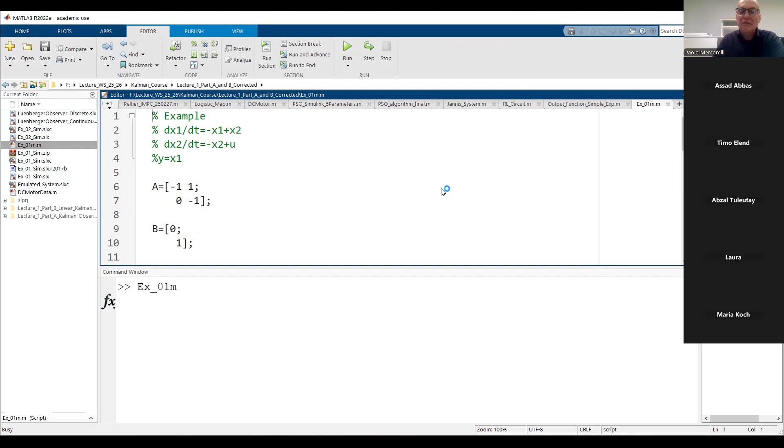Yeah, this is the M file, which I presented, I think, 2 or 3 times. Let me run this M file, in which we can see again the system which we considered many times, characterized by the matrix A. You can find the details in the first presentation. It's characterized by the matrices A, B, and C, in which we are measuring the variable x1.

With this variable, you remember, the system results fully observable. This means without any problems we can build the Luenberger observer. Let me open the Simulink file. I analyzed this in depth last time. Let me just show you which kind of problems we have if I include the noise in the measurements, first of all, and then if I consider some unknown parts in the model. And then I have the possibility to go more in depth in the philosophy of the observation.

Just a second, because MATLAB is running. In the meantime, let me see if I find something. Okay. Ready.

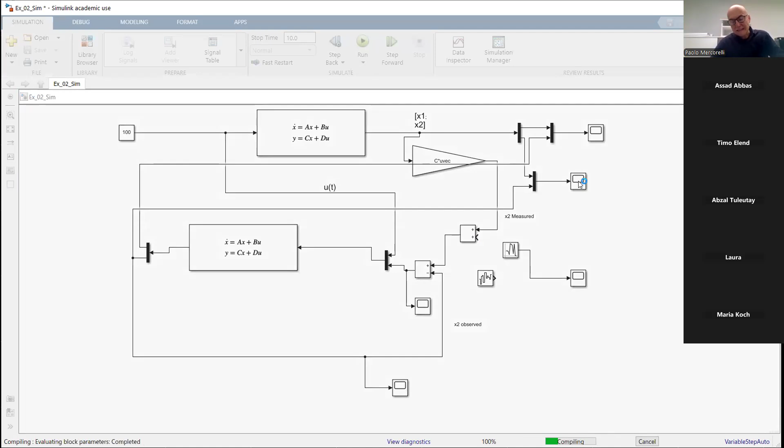Let me now share the Simulink. Do you remember, we have seen this in detail. I think at the end I showed you also the case with the noise, but let me redo it without noise. And we have a relatively good observation of results. I don't want to say observation, because observability is a structural characteristic. I would like to say we have relatively good results.

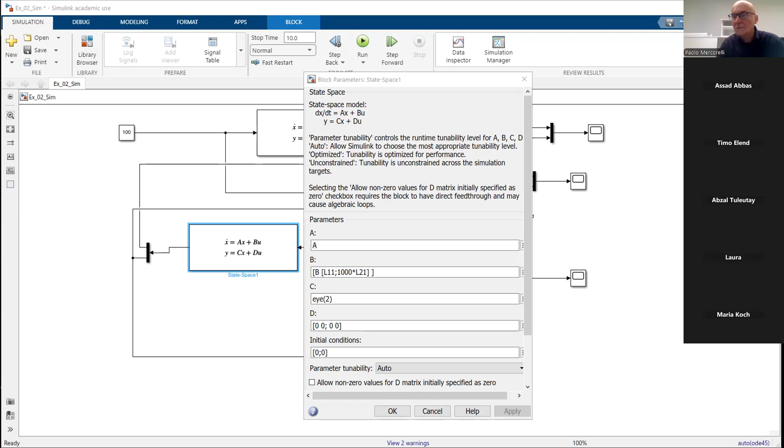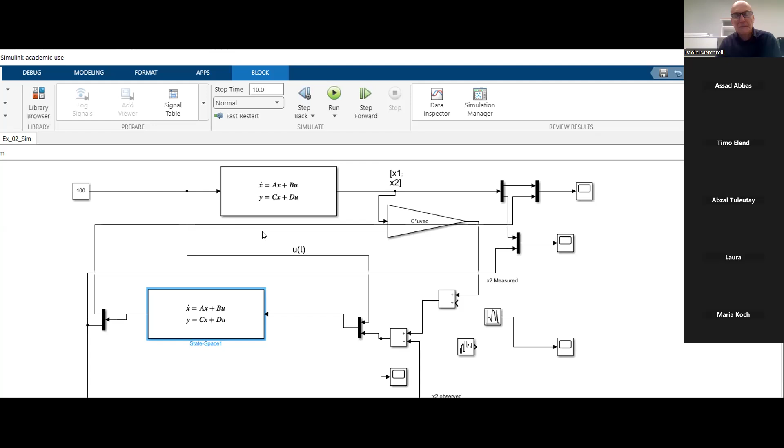Of course, here probably I changed the matrix A. Let me see, one second. I think this is not the file. Is this the correct file? I tested different things. Let me see in the folder. Okay, this is exercise number 2, which I didn't show you. Excuse me. Let me close this. Let me open the right file, which is example number 1. It's here. Let me share. Okay.

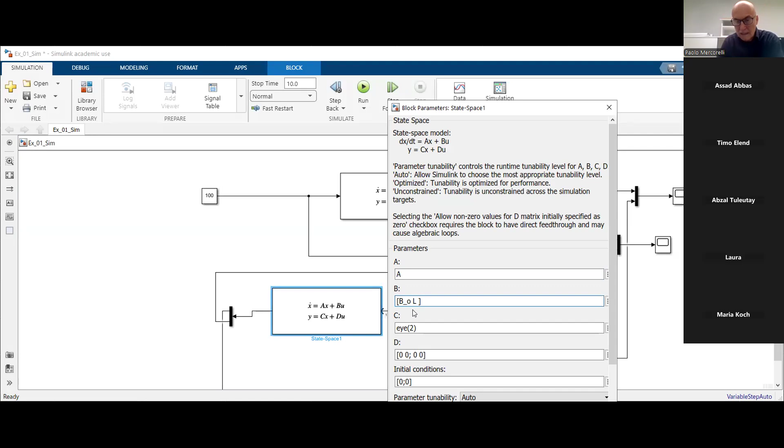Here we can see example number 1, as I told you last time. Let me eliminate the noise and show you what we had last time. This was the result. You remember last time I told you many times how I can accelerate the dynamics of the observer.

But of course, you remember I told you that accelerating the dynamics of the observer, I typically increase this peaking effect. We will see that using the Kalman filter we can minimize also this peaking effect, maintaining good results in terms of speed of convergence, because the Kalman filter is an optimal approach. This means we can find a compromise.

You remember I told you, placing the eigenvalues of the matrix A minus L multiplied by C, I can speed up the convergence of the blue line, roughly speaking, of the observer. The convergence is an asymptotic convergence because the structure here is not a finite time observer. And then we discussed a lot.

Let me show you what happens if I have measurement noise. I think I share; sometimes I forget to share. If I add the measurement noise, now we have some problems. The problem is not connected with observability, because the system is observable; the observability characteristic remains. But we will see an effect that we would like to minimize, and the Kalman filter is exactly a structure that tries to minimize this effect, which we can see in the results.

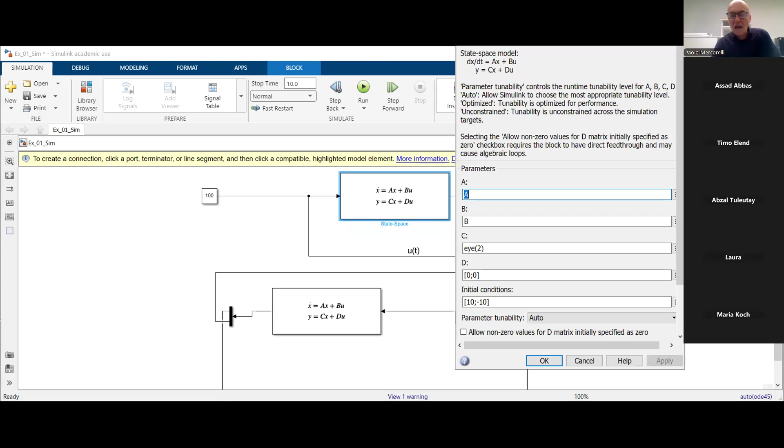Assuming that I know the system perfectly. This means, let me show you, until now we have seen a linear system characterized by the A, B, C, D matrices. And this structure here can be found in a part of the system here, inside. Let me show you this.

In the observer, we can see that we have the matrix A here, the matrix B here. We have the matrix L. I told you about the matrix L, the meaning of that, to place the eigenvalues. We speak about the eigenvalues because we are in the case of linear systems, in order to speed up the dynamics of the observer, or let me say, to reduce asymptotically to zero the estimation error.

Arbitrarily. Look, if I change this, now why do I change? Because it could be that I don't have exact knowledge about the system. Assuming that I am able to say we have just two states, as in this case, x1 and x2, it could be that I don't know exactly the parameters which characterize the model. Let me show you what this B_o is, the B observer, let me share.

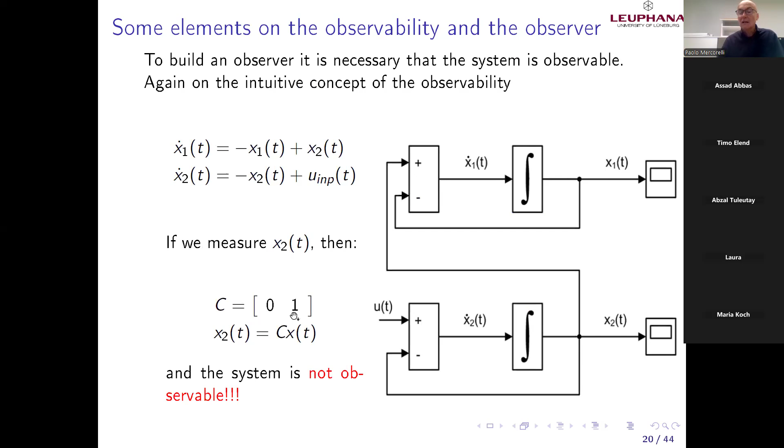But both dynamics, x1 and x2, are asymptotically stable, because the eigenvalues of the matrix, which I calculated for you, were -1, -1. Somehow we can build the observer, but of course it's a particular observer because I cannot state as I want the dynamics of the observer itself.

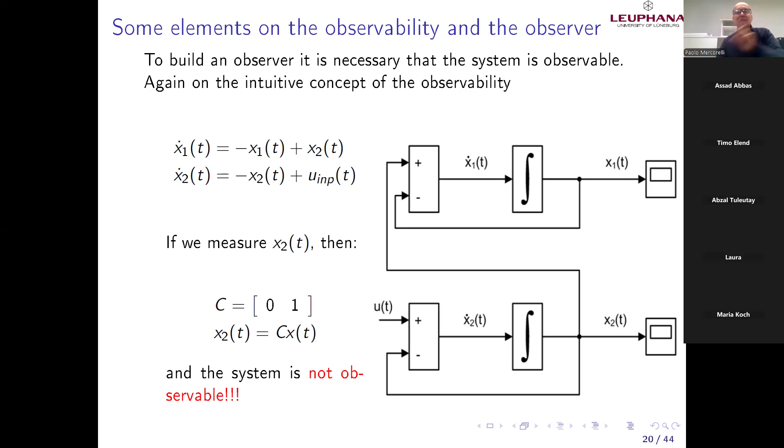So let me show you quickly. I opened the example number 2, and it makes sense now to show you, even though I didn't upload it, but I will. This is the example. Using 0, 1 through the calculation, I will obtain this equation here, in which we have just one parameter to be designed, L21, because L11 disappears because of the presence of the 0 in the determinant. I told you this last time.

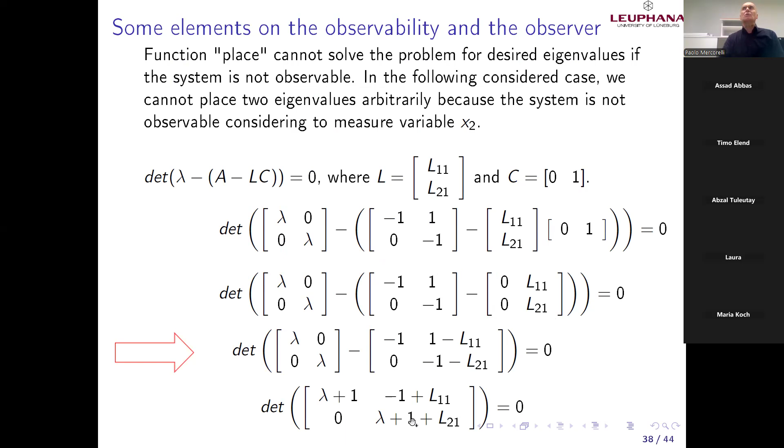And of course, I cannot place both eigenvalues. I can place just one. We can see here I cannot place both because I have just one parameter. Now, if you look at this easy example, we have just one parameter, exactly the equation as I told you.

Now, assuming that I would like to place the eigenvalue lambda1 equals -2, I can calculate L21, easy, a high school exercise. Now, with L21 equal 1, I can calculate this equation here, which can be written in this form, where I have the other eigenvalue.

There is a theorem which I don't have time for, but I can show you nevertheless that if the system is detectable, meaning the unobservable part of the system is asymptotically stable, I can always find parameters, in this case one parameter, for which both eigenvalues have a negative real part. This means I can always build an observer, but with some constraints.

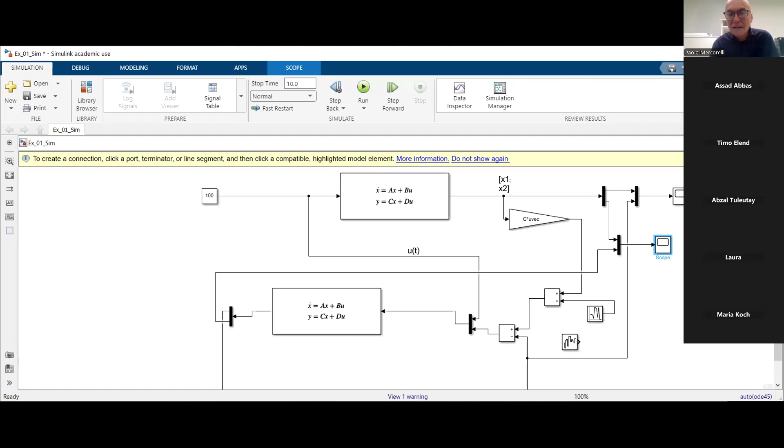Which I opened, let me see. No, this is number 1. This is number 2, I think. I will upload it, but not now because I would like to go ahead with the lecture. Look, here we have a C. Let me see if this is exactly the case. 0, 1. Now is the case. Let me run.

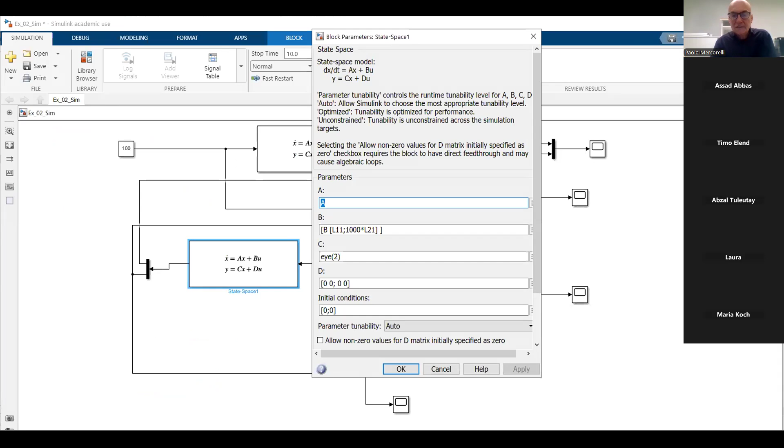We have an error because, as I told you, I cannot place both eigenvalues. Therefore, the function place is not able to solve the problem. But now we will put exactly the case as I presented. If I go here inside, let me see. I calculated it for you.

L21 equal 1, right? Yeah. This means I go here inside. L21 equal 1. And yeah, I can put whatever I want. This came from here, no? If everything is calculated correctly.

Why I put L21 equal 1? Because for L21 equal 1, I have a lambda equal -2, if I remember well. Yeah, lambda 1 -2. And lambda 2 should, I hope the calculations are correct, equal -1, independently of L11. But L11 does not appear in the calculation because the determinant goes to 0. Let me see if everything is correct. But we will see.

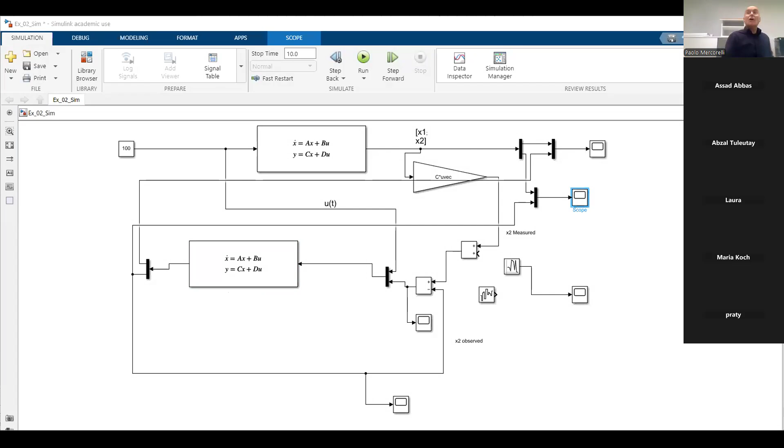Yeah. This is what we obtain. Of course, we have an observation. It's not so extremely bad, but of course, we are limited in the choice of the dynamics in accordance with what I told you with these calculations. This means, nevertheless, in conclusion, if the system is not fully observable but detectable, the non-observable parts, I told you a little bit last time, but we can nevertheless build, with some restriction, the observer.

Concluding this observability, I would like to tell you a few things about, let me see, where is the presentation? Yeah. You can find in this presentation a few slides at the end considering the nonlinear observability. I will come back really in detail during the semester when I will tell you about the extended Kalman filter, which is one of the possible approaches if the system is nonlinear. About the nonlinearity, I didn't tell you. I told you a little bit about linear systems without introducing the mathematical definition, linear time variant and linear time invariant. I tried to distinguish both. Here, just a few words.

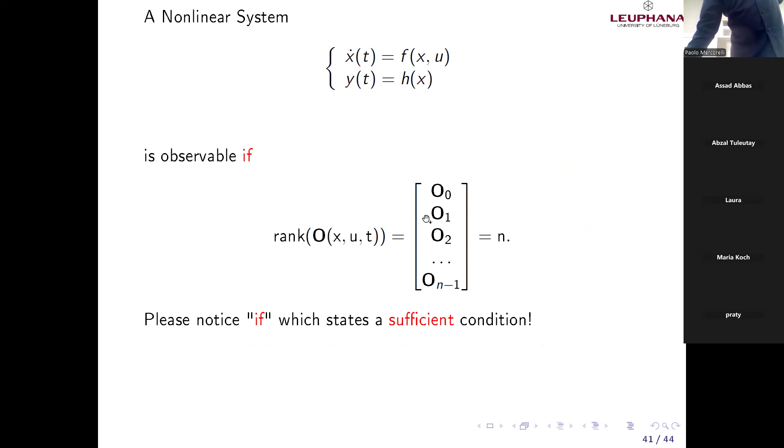And we can see also another concept, weak. This means that the observability could depend on the input. Remember, at this moment we have seen, don't care about the input. The test is characterized by the matrix A and C. This means the dynamics, characterized by the matrix A, and what I am measuring. Do you remember the test? C, C multiply A, C multiply A squared; B does not appear. Also independently of whether the system is time invariant or time variant. Very important, linear. If the system is not linear, the test depends on the input too. We come back on this. The test is extremely complicated to be explained, but extremely easy to be done. I will do it when we consider the nonlinear systems.

Okay, now please open, if you want, the lecture of the Kalman filter. I will upload example number 2 at the end of the lecture, because I would like to go ahead. So we have also this simulation of detectability, this idea that I cannot place all eigenvalues as I want, but nevertheless, even though the system is not observable, I can build somehow. We have seen that it works, but of course, it could be that it will not work as I want, because the eigenvalues cannot be placed arbitrarily.

Look now at the second presentation. The second presentation looks like something like that. Let me share in 1 second. Look, linear. We are in the linear case. Discrete Kalman filter as a state observer. About the Kalman filter, I told you roughly at this moment. Discrete is something which I need to clarify, but we have an example in order to clarify discrete at the beginning. Before clarifying the word discrete, again, the literature.

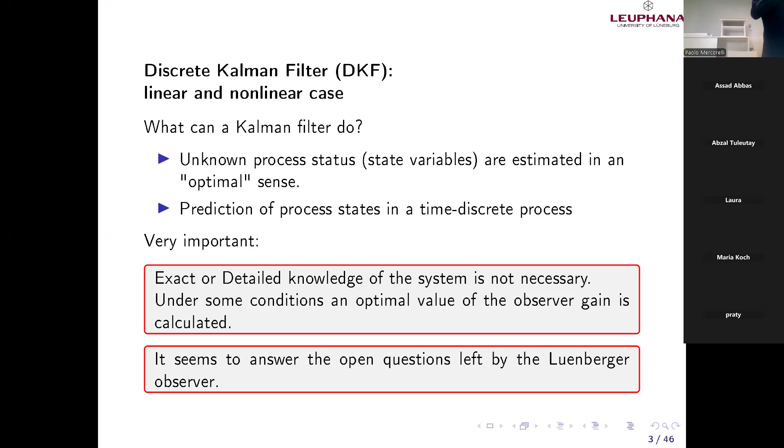I think this concept of unknown is now to be considered, and we can see also the second sentence here: the discrete form of the observer allows us to realize the prediction, which is an important point in the Kalman filter. This point is not so important in other observer structures. I realize an observation even though something is unknown, noise in the measurements or structural uncertainties in the system, and I realize a prediction, which is the kernel, let me say, of the Kalman filter.

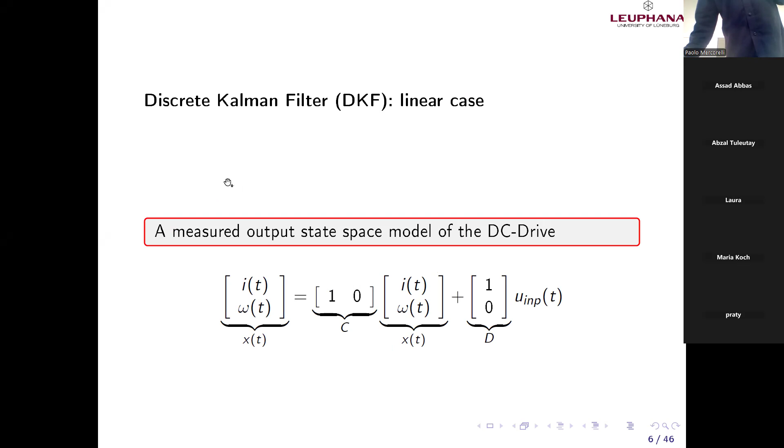You remember the system here? Continuous system, the motor. I don't want to go in depth again on this. I measure the current. I want to observe current and velocity. Now, a few words about the discretization, because discretization plays an important role in each observer, but in particular in the Kalman filter because of this prediction. Until now, I told you about the discrete just by showing you a scheme parallel to the continuous in the context of Luenberger.

If you want, I show you again. As I told you, in Luenberger, at least if you look at the picture, we cannot see any differences in the notation. But nevertheless, the dynamics is totally different. A continuous Luenberger has dynamics totally different from a discrete Luenberger. I don't have time to show you the discrete Luenberger, but I will introduce some concepts related to discretization in order to introduce the Kalman filter. Discrete dynamics are totally different with respect to continuous dynamics. What is the discrete dynamics?

Let me look if I find something to show you quickly. I don't know why this slide is not here. One second. I will do it. Yeah.

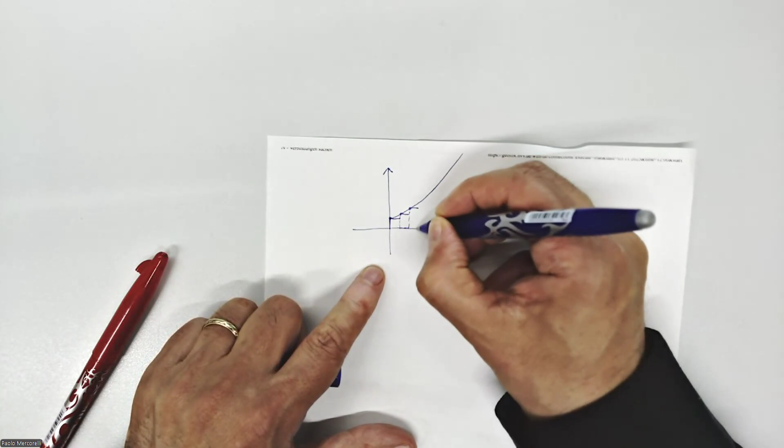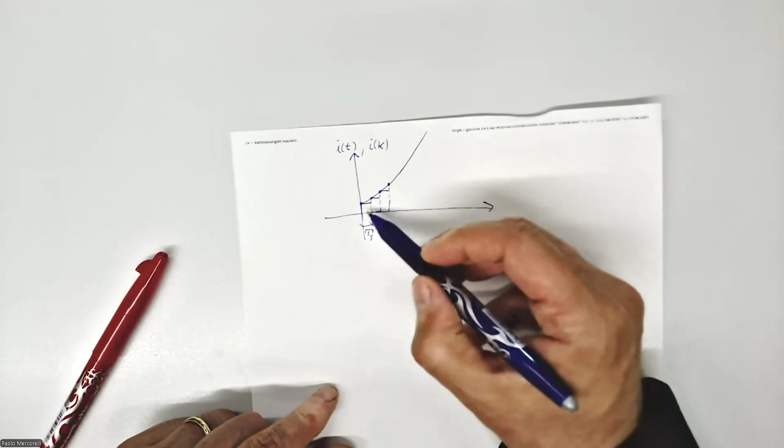Yeah, this is our Ts, fixed at this moment. It could also be variable, but let me fix it. We approximate this continuous signal with a stepwise constant function. The derivative is approximated, as I told you, as this level minus this level divided by Ts. Assume this is I of t, and I of k: I of t the continuous, I of k the stepwise constant.

Now, if you remember, the derivative of I of t at each k was defined in this form. This means, for instance, if this is k, I of k minus I of k minus 1 divided by Ts. Now please pay attention, it's a little bit philosophical. I can do the same for omega and so on. If I of k is the future, I of k minus 1 is the present.

Let me say it more easily. If I of k is tomorrow, I of k minus 1 is today. Now, question: if I were to approximate the derivative of the current as tomorrow minus today, I know just today. Tomorrow I don't know.

Consider this a little bit formal, but if you don't like it, consider a different way in which I of k is the present and I of k minus 1 is the past. This makes sense also practically to calculate. But it does not matter which you consider, because formally the idea is to build, in any case, a prediction.

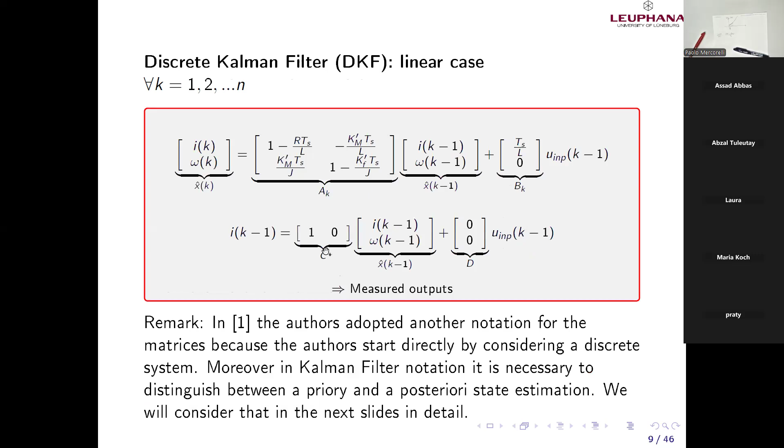Basically, here, to virtually approximate the derivative of the current. Virtual means it's connected with forward because I'm considering the future, or better, let me say, the present minus the past. So it's more concrete. Let me tell you about this virtual. This is not concrete, but to clarify better the word forward.

If this is the present, I can approximate virtually the derivative of the current: the future minus the present. I look forward to approximate virtually the current. If I am considering Ik as the actual value in the backward, I look back to approximate the derivative. It seems a formal difference, but the approximation is totally different. We have two different Kalman filters using two different discretizations.

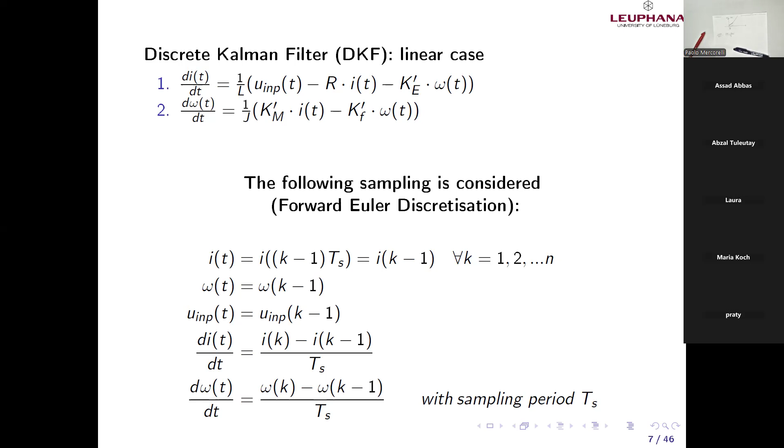We can use the backward Euler in case of stiff systems, when we have two eigenvalues or two dynamics, in the nonlinear case, one very fast and one very slow, but now I cannot clarify why. 1 second to conclude, to introduce the lecture of next time.

Kalman filter. We can see from this possible scheme, we have everything discrete, A equal AK, B equal BK. In this paper, we consider A equal AK, B equal BK, XK and UK are the sampled signals, state vector and input. We will see together next time the dimensions. Very important here, the new thing with respect to what we have seen until now, is that we introduce a system noise, a vector with the same dimension of the state, which tries to capture what I don't know about the state.

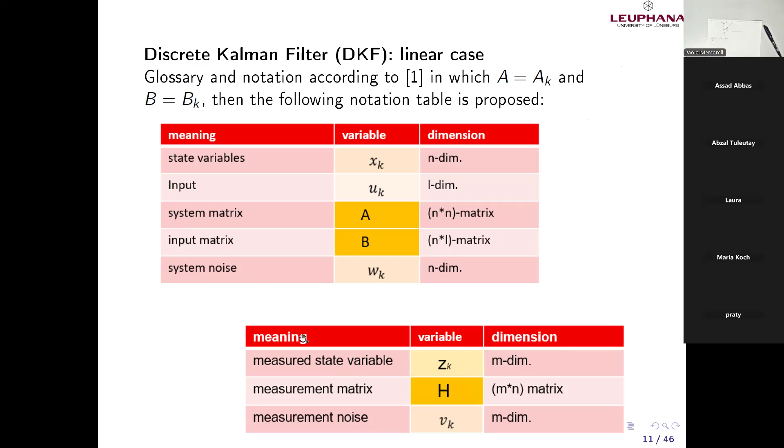Thank you to be here. If you have a question, we're here for you. Otherwise, we will see next week. I think next week I will really show you quickly these 5 equations so we can start to simulate, because I think we can understand better with the equations, with MATLAB.